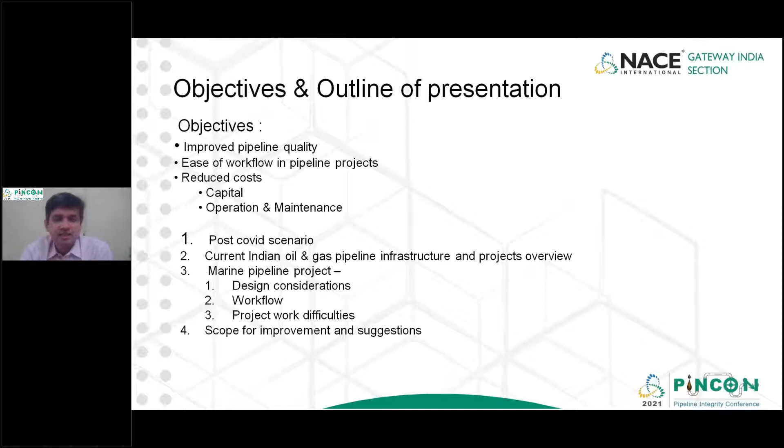So first I would like to explain what the post-COVID scenario is, then give an overview of current Indian oil and gas pipeline infrastructure and projects. Then I would speak about marine pipeline projects: design considerations and how the workflow is made for pipeline projects during installation and commissioning. Then I would like to bring out the pipeline project work difficulties, and then I would suggest improvements in the current scenario.

In the post-COVID scenario, you would have increased bottlenecks in logistics, an increased push for self-reliance, and protectionism from the government, and funds will be drying up with both the government and the public sector undertaking units. The accelerated shift to renewable energy will be taken up much more proactively in this scenario. We will see reduced infrastructure investment in oil and gas, and also an increase in e-commerce.

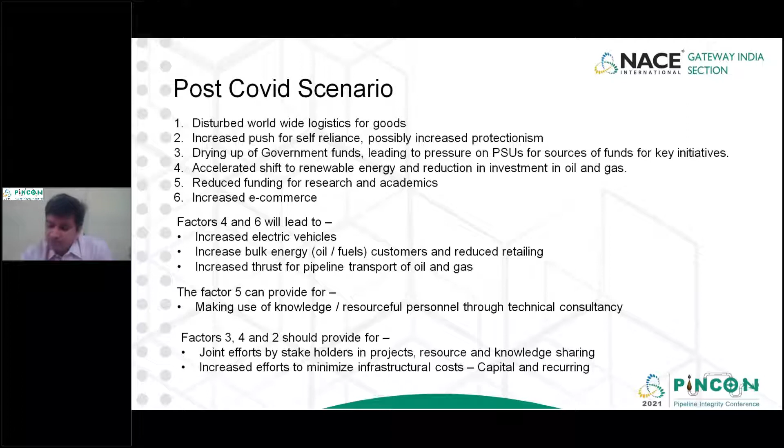All these factors would contribute to encouraging electric power generation and reduce the retail utility of these oil and gas resources. So we would see requirements coming up in localized areas with large demand, and reduced overall retailing costs. That is how we can visualize the post-COVID scenario. So research funding will be minimized. At the same time, we have to improve our quality and workflow to consolidate whatever resources we have with us.

So in the current Indian oil and gas pipeline infrastructure, the public sector undertaking oil companies such as IOCL and HPCL operate large networks of pipelines. There are also new ports and industrial demand, which I listed in the previous slide. Bulk consumers will be cropping up to meet the increased electric power generation. Then upgrading and replacing aging infrastructure will be there.

Presently, for new projects, each PSU oil company works independently on its own. Seldom do these oil companies maintain their own design and project management teams. Most of the capital and maintenance works are outsourced. So PSUs don't have dedicated specialists for implementing maritime pipeline projects. They entrust the works to specialized bodies such as Engineers India Limited or similar firms, which do the complete project, right from planning, executing, monitoring and controlling. All the work is done by contracting firms.

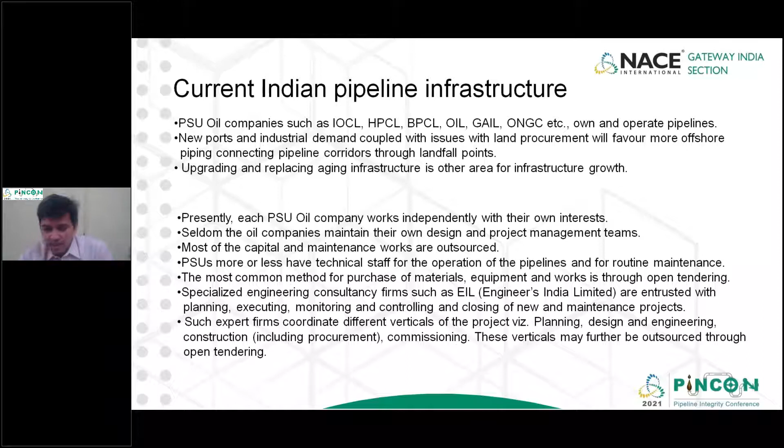So when such firms are there, how do the Indian energy companies work with them? Basically, they act as owners, and to meet their requirements, they entrust the works to specialized companies. Now, these specialized companies also have to be identified in a proper way, following the norms laid out by the financial rules and the procurement of goods and services.

So the common mode of finding a specialized entity is also through tendering, and the firm which is identified carries out the complete project installation. Right from material supply to surveys, everything is done through open tendering at each and every stage. This is the requirement of public sector undertaking companies. So this particular channel is key for implementing pipeline projects, and I'm trying to concentrate on this area.

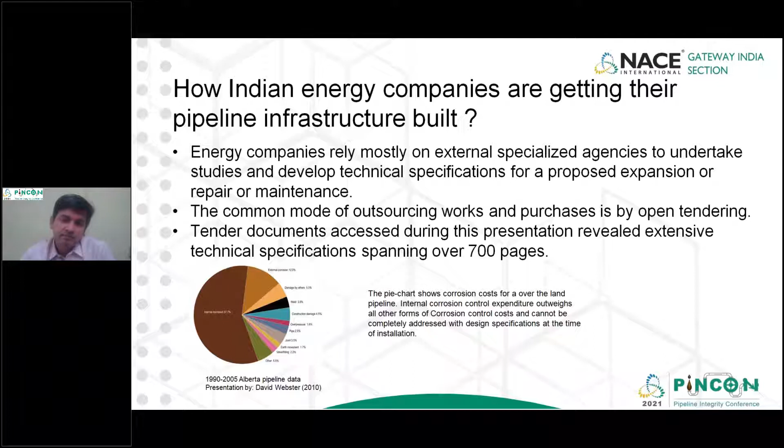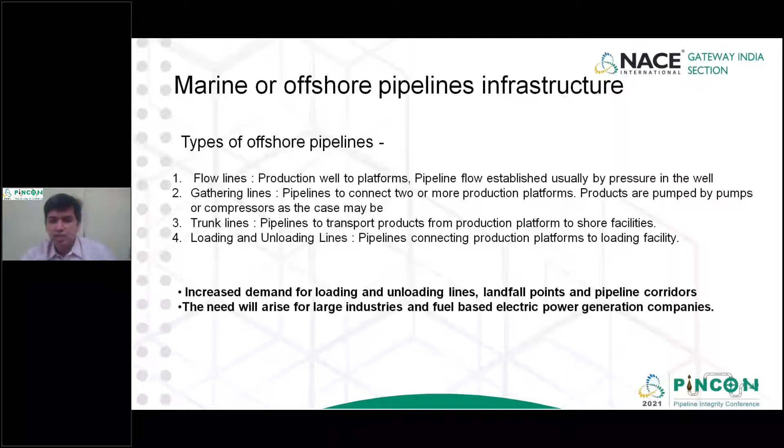You would need, say, to supply the bulk consumers in India, and the land route is often not feasible due to problems with land acquisition and such things. So the easiest route would be a marine pipeline, where you can introduce certain landfall points suitably and connect these bulk suppliers. And the design considerations are very elaborate.

A marine pipeline project is highly complex because of the marine environment. You have to have a thorough understanding of the environment, ecosystem, environment protection, then overall cost, how the pipelines are implemented. It is altogether a very complex project for its implementation. So the design specs can be prepared after elaborate study, and they can be specified in the tender documents, because I told you that we will be specifying everything through written documents.

So the current practices are that the PSUs list out elaborate requirements. Their own requirements are running into 700 pages or even exceeding that. It's a highly complex operation, so PSUs want to take control of each and every parameter. In doing so, I find that it has become increasingly complex. The complex tender will lead to increased costs. It will lead to ambiguity with the contractor finalized, because ultimately the engineers have to work with the technical specs.

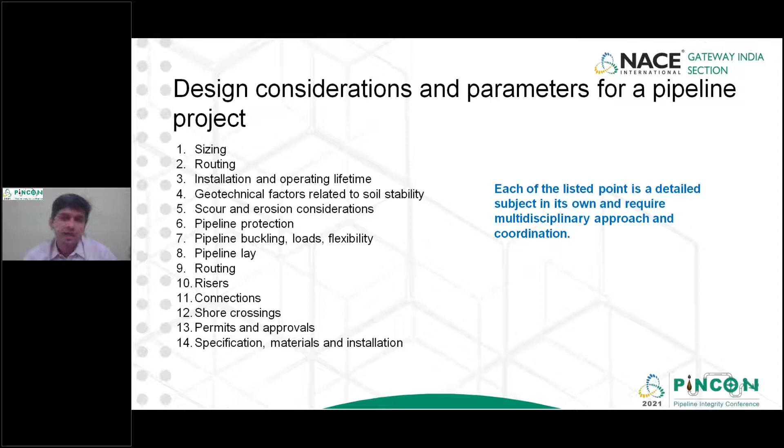When we refer to so many standards in our tendering and we cite our own specifications, which are in addition to the specifications laid out by the international industry, we will have difficulty with testing, procurement, increased cost for monitoring. All such things will come into the picture.

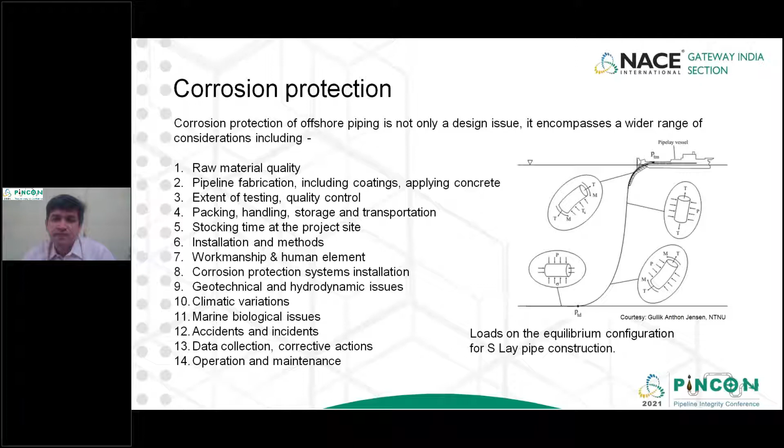So apart from the design considerations which can be specified, corrosion protection is one of the key elements in a marine pipeline environment. Because of the corrosive environment, it can be specified in a number of ways, like raw material quality, extent of testing, pipeline fabrication, packing, handling, where you are stocking, how it is being transported, workmanship, geotechnical and hydrodynamic issues, everything you can consider. But there is more to it. That is due to the complexity of the pipeline laying.

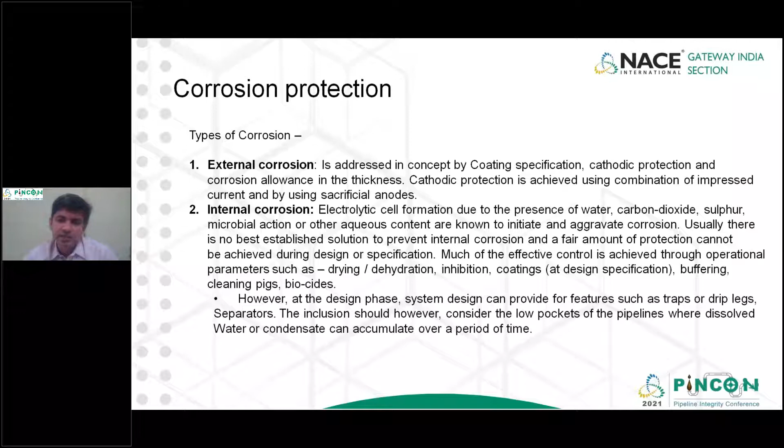Usually, this corrosion protection can be specified for external and internal in the tender docs. That is what we see most of the time. Externally, coating and current cathodic protection system is being specified. Internal corrosion is highly variable, as I have listed. But overall, if you look at the project flow that happens in any pipeline project, it is something like this that I have listed.

Initially, you identify a contractor specialist company, then the specialized company would further identify who will supply the pipeline, who will supply the corrosion protection equipment, who will do the coating. All such things will be specified individually, following the technical document prepared by the PSU in the tender. That is called technical specifications in the tender. So usually that is constantly referred to in this implementation.

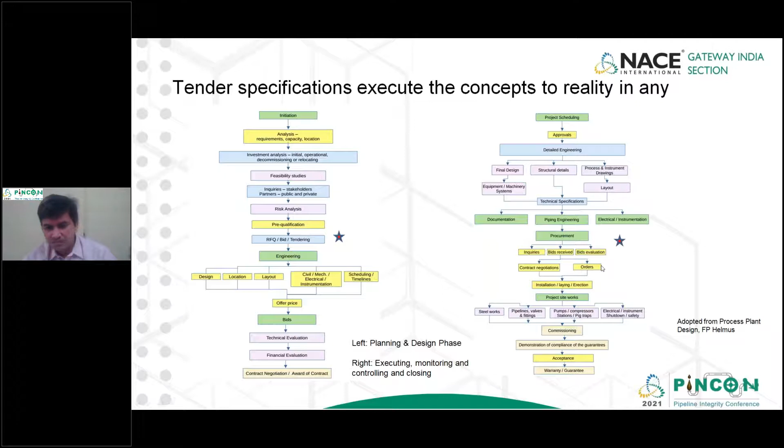And also at the time of procurement of individual items, where you have designed everything, identified the location and layout, when you are procuring the goods and services, you will have to further release the technical specs through inquiries, bids, or evaluation. So pipeline installation is a very complex job. It is highly variable, but we don't see it written in the technical specs often.

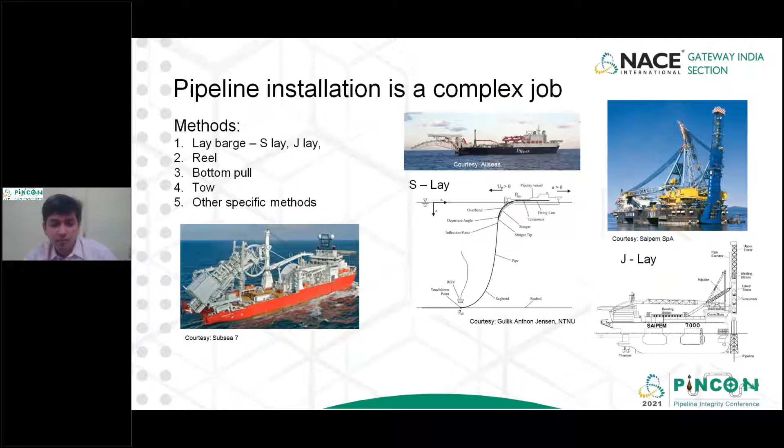Each ship is very highly specialized and the costs are tremendous here. This is one of the single most expensive items in a pipeline project, hiring the ships, how much time you would hire, what kind of ship you would hire, what would be the capability. And also the pipeline laying will bring in a lot of issues with it: how the crew are handling the pipelines, whether they're welding it properly.

The manufacturing facility will supply pipelines in standard lengths. They will be supplied with factory coated coatings with concrete to prevent the pipeline floating in water. So those pipelines need to be handled very carefully - how they are lifted, how operations are done, whether people have taken care in handling such pipeline, not damaging or introducing stresses, because everything affects the corrosion strength for that particular pipeline. Even the edge machining, how the welding is handled, what kind of inspection is done after the weld, what kind of pre and post treatments are being done.

These are highly specialized and highly variable processes. So not everything can be taken care of in the technical tendering, though the PSUs are making a good effort in increasing the volume and detailing every spec, but not everything can be specified.

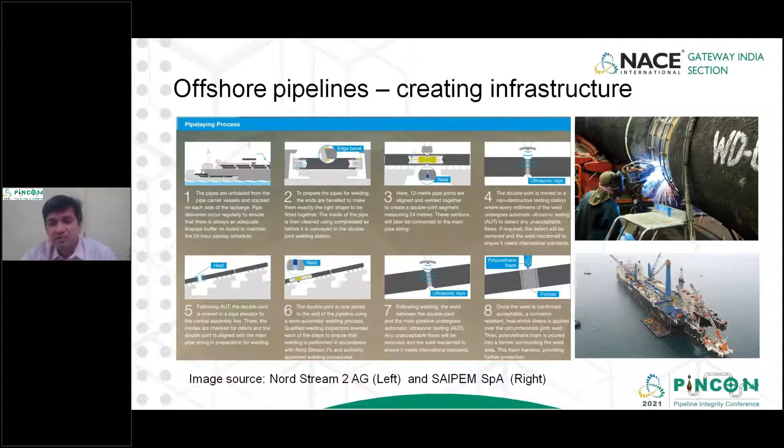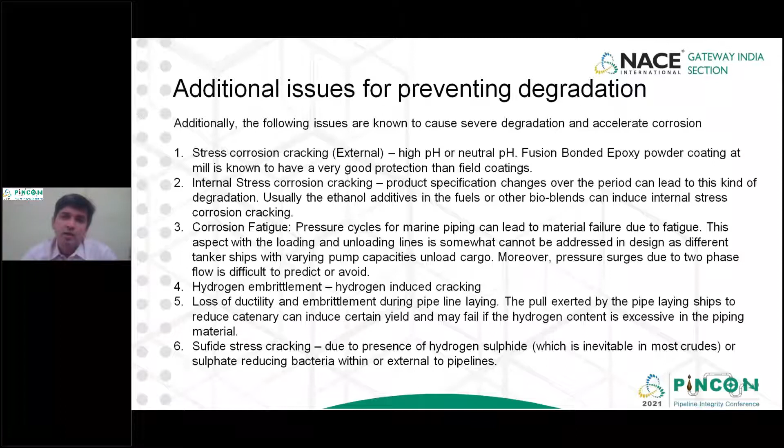Once the joint is made, it has to be properly sealed to prevent seawater contact with the bare metal. You also have to take care of various other regular corrosion issues common to marine pipeline segments. So it's not only specifications on paper, but the contractor, their crew, their engineers - everybody has to take care in handling the products.

So that is where a lot of variability is there in the costing, but it is not being specified in the tenders. These are the areas I'm going to address, and carry out a few comparisons of what is going wrong. If you look at the tenders, they were prepared in great detail.

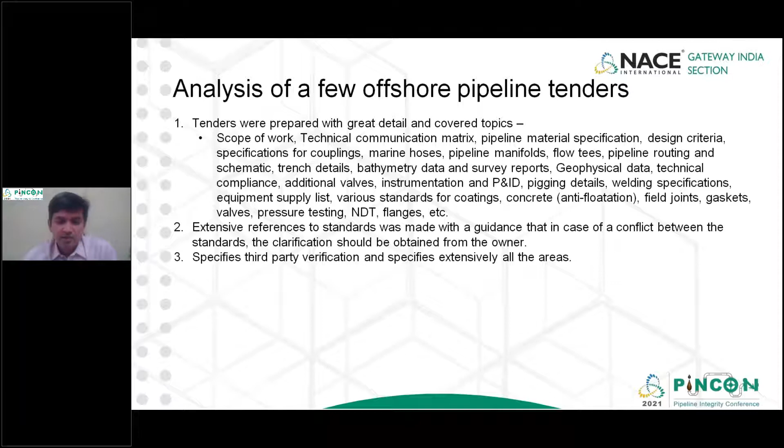If you look at pipeline international standards, we have the standard DNV-ST-F101, which is the primary referred standard for marine pipelines. It itself is a self-sufficient standard because it refers to various other standards in ensuring the integrity of the pipeline, the corrosion protection, and all the design objectives. It gives overall guidance basically, so reference to such a standard is self-sufficient.

Moreover, I told you that operational difficulties are not being addressed in the tender - it cannot be addressed. So how do we overcome this difficulty? It is to identify a good contractor. Getting a good contractor using the frameworks with financial rules for goods and procurement is often a very difficult job.

Moreover, once you identify a contractor, he would try to optimize his cost savings on things such as logistics - maybe the pipeline laying vessel - he may cut down the cost by hiring cheaper alternatives. So ultimately, we do not have control on each and every parameter. So the entire exercise of detailing so much in the engineering technical aspects will be defeated in the end.

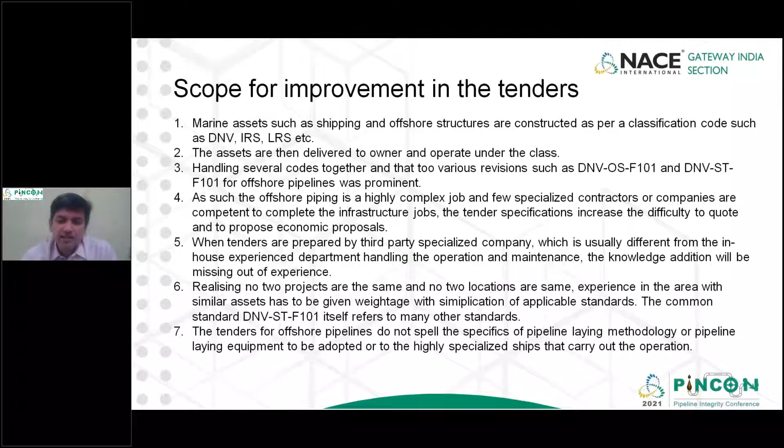Realizing this aspect, the oil company should look at these areas. They have to do a bit of exercise with experts in the field who are contractors laying out the pipelines, to understand what issues are coming up. Then they have to consult their own team that is operating these pipelines, because they will be able to suggest what maintenance difficulties and operational difficulties are coming with the existing pipelines. They will be able to greatly enhance the pipeline integrity. They can contribute a lot to cut down the costing also, the operational cost.

So when an oil company outsources everything, the in-house expertise that is there in operation and maintenance is not received or captured. Moreover, time frames, though they are specified in some broad way especially in pipeline laying, the hiring costs are tremendously large, especially with respect to ships, logistics, and cranes and all.

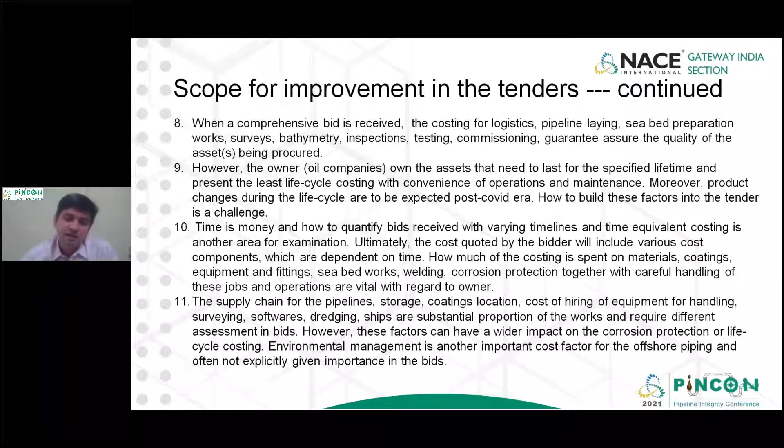So it requires a careful analysis to cut down costs. Every chain you have to identify. The best part I would suggest, instead of going in a very consolidated, complex way, split down the tender into various work-based aspects. Define a small scope, then give a timeline for it. You define the activity in the timeline, then work out the cost.

Each step you further analyze into blocks, individual blocks. Carry out block by block in a whole lot of workflow together. The entire pipeline project would go for implementation in one go, but it would be split up into individual elements so that there is a very careful control of the chain, where the previous tenders were lacking.

You will be able to see on the ground what is happening, where the time scheduling is increasing, where the costs are increasing. We can optimize the costing there at each and every step in this way.

And also, you can request the financial bids to be given in the format that is being suggested, that the work-based items that we have identified can be addressed very carefully, that each scope is there, each time is there. So the financial bids should be received as per costing of individual blocks.

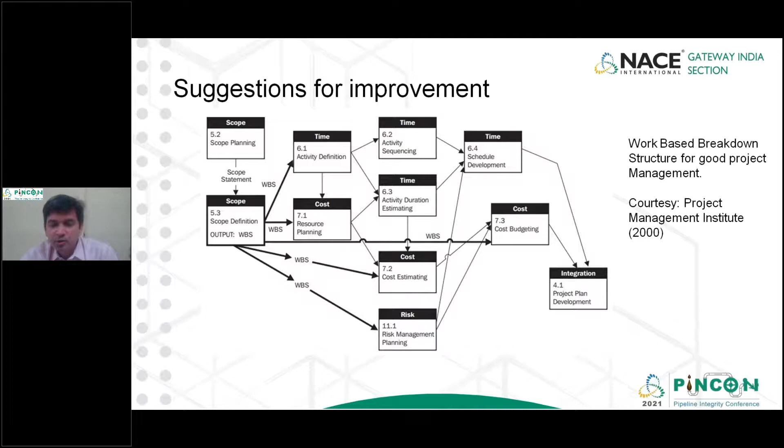If we actually ask for complete cost, without careful identification of these individual works and the scopes that have been shown here - this is a very good project management idea. I think it should be implemented in the tendering for achieving our objectives.

Moreover, the protectionism is going to last, such as the DMI&SP policy, which talks about the purchase of only Indian goods - steel, iron, and steel.

So oil companies not only have to look at just the project, but they have to also now open their eyes towards the Indian industry, who is manufacturing what is available, send their representatives, get a quality check, advise them on improving the quality, and improve the industry so that their project will be benefited in the long run.

I think this is the way ahead in post-COVID scenario. Earlier, this exercise may be done with certain severity, but now more thrust is there because of protectionism. We can't import everything from other countries.

And also, for the utility of the PSU, the technical manpower availability is enhanced in post-COVID scenario because you can outsource, or you can even offer technical consultancy to academic universities and institutions or research bodies in India, because the overall availability of these people has increased now since research funding has gone down. So more people are available.

So PSU can work on all these larger scopes effectively by managing them, forming work groups of specialists. This is some of the exercises.

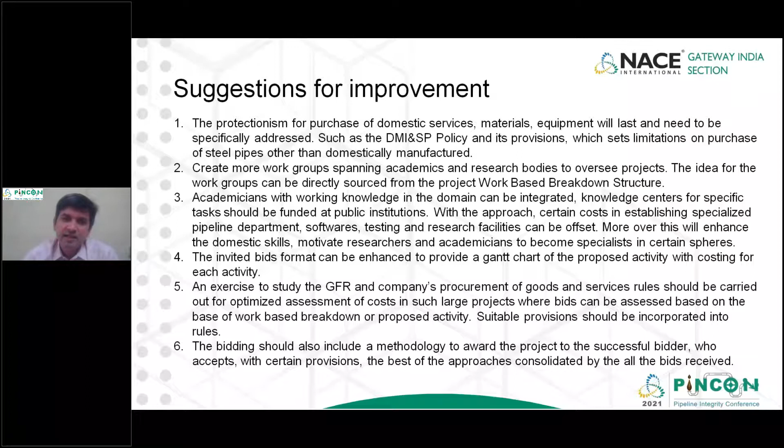That has to be stressed and brought out in various committees, and the top management should be convinced in this regard. So these are some of the suggestions that I would like to convey.

And moreover, not the least, environmental management is something very amiss in the projects. Environmental management is one of the single most important objectives for marine projects. That itself should be included in the tender scope for the entire project.

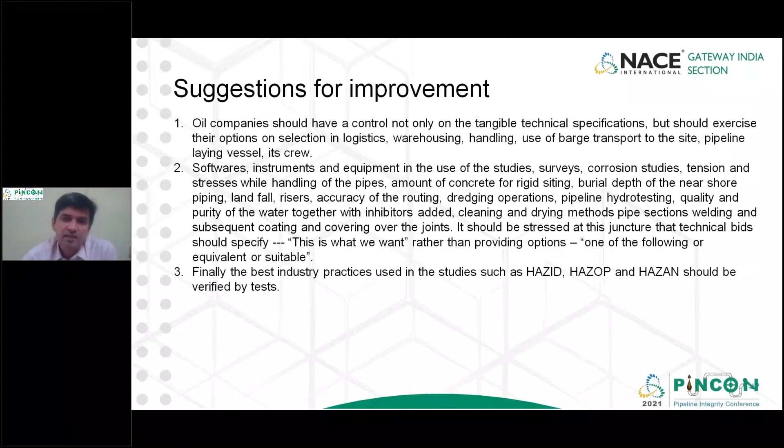So I think with this we should be able to improve our view, because ultimately our business should not reflect dirty in the public due to the renewable thrust which is on. People are looking down upon oil and gas, so we should not get a lackadaisical approach towards oil and gas, for our continued prosperity. That is one area which I would suggest for improvement.